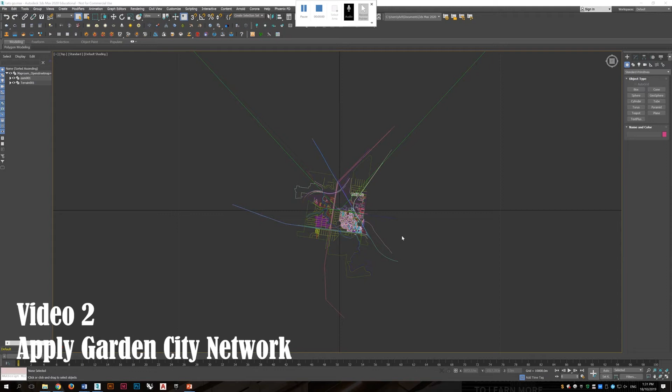Hello. In this video, I will focus on how to apply the Garden City network onto site Albion.

First of all, we go to create and make a plane into it. Then we go to material editor. We have to make sure the current renderer is V-Ray, because we're always using V-Ray as our renderer and we have to make it consistent. We also need to have a look on exposure control to make it under V-Ray as well. Then we create a V-Ray material.

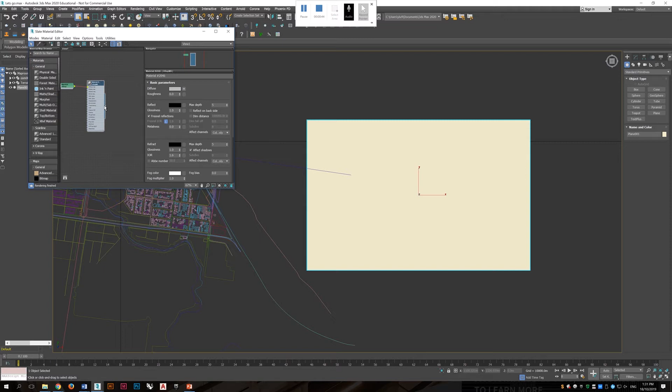Then we select the diffuse, select bitmap, and choose the image we want, which is the Garden City plan. Then we apply this material to the plane, but nothing's showing because we have to click on Show Shaded Material in Viewport. And now here it is.

And we just need to adjust the size of this image because it feels like it's been stretched. Okay, change the scale, and we are going to change the existing context.

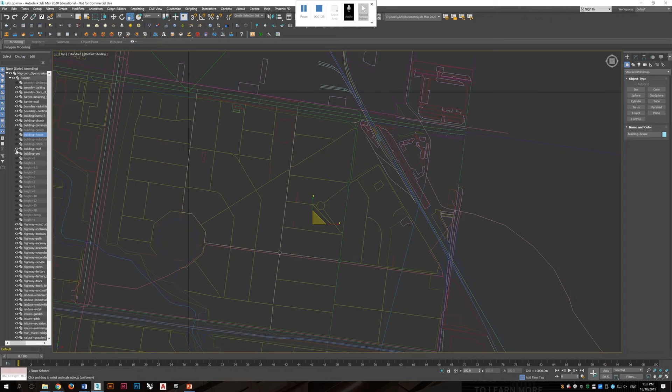We don't need the building anymore because we're going to make new ones. So we're making the old one invisible. And also the networks, because we're going to have a new network instead.

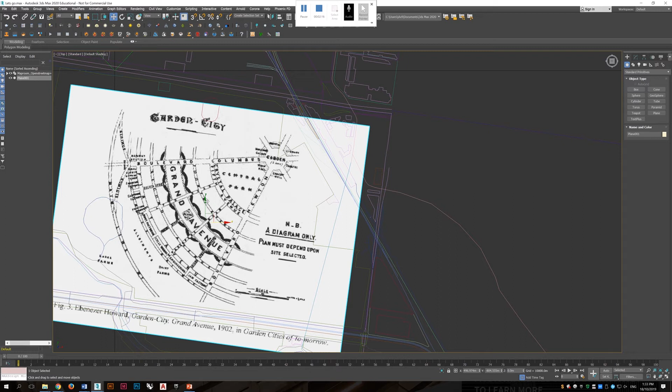Now we put our base map into our context and align the core of Garden City to the flour mill, because we are going to make the flour mill the future library and museum. And just like that, we are going to use the circle tool to trace the network of Garden City urban planning.

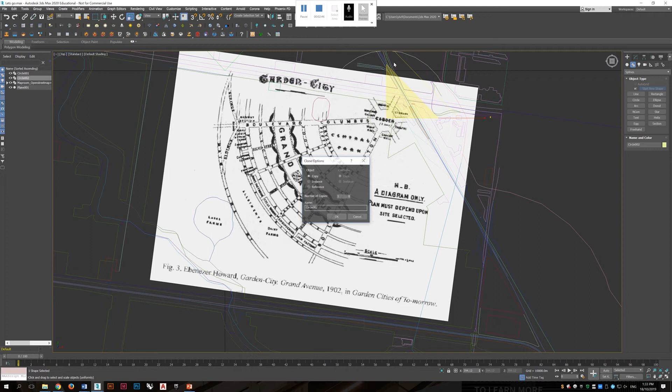And also we will have the other side as well. We rotate the base map and align the core onto the public green space, which is our community garden, which will hold the future community services and activities for local residents. We also draw the circle networks as well.

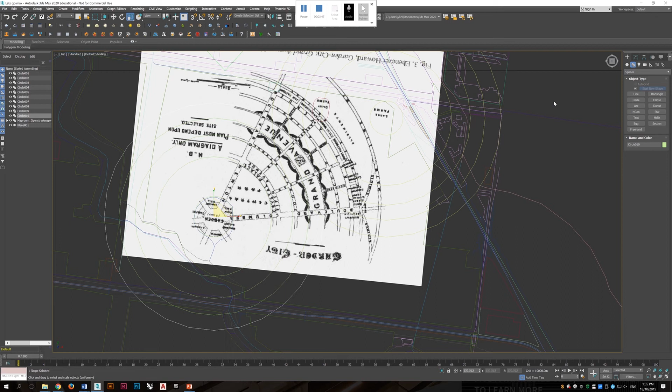After that, we are going to draw the linear laneway, especially these three in the middle, because they are going to act as the future public open space, so people can play in the street. Also, the local retailers are going to have their business happening along these streets. So they're really important.

We can draw some finer network going into the suburb as well.

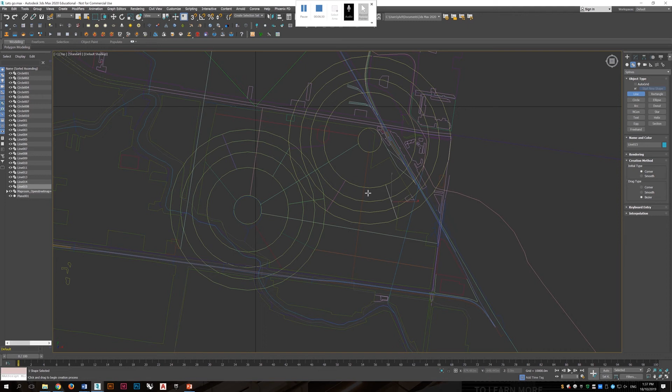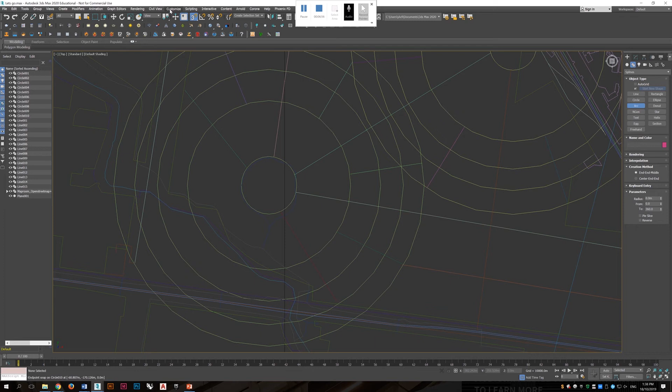And one important thing we can see here, the circles, many of them are out of the boundary of Albion. Some of them are going into the park beside it, which means we are going to draw arcs along these circles, but make sure they are within the boundary.

So now we're having the whole network of Garden City in Albion. And the next thing we are going to do is make these splines more like a road.

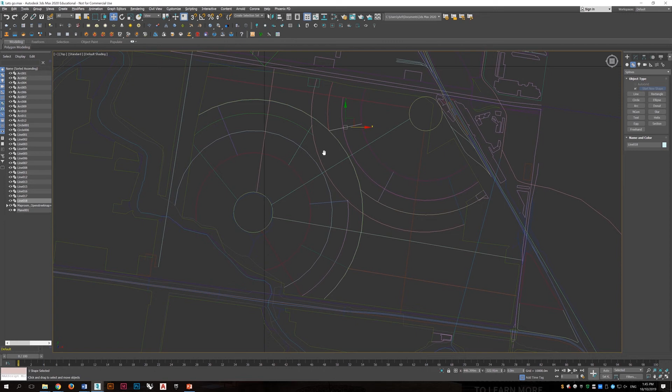So what I'll do first is draw a spline here, and I'll make the length of it 40, so a 40-meter wide road.

And we go to create compound object. We select on loft, and get shape. Choose the 40 spline, and we have a shape for our road.

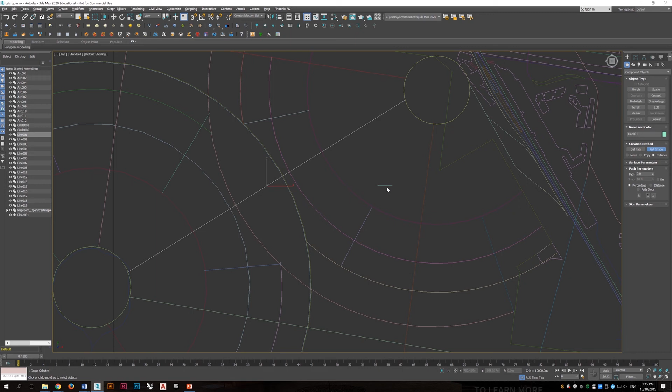And we can do the same thing to all the splines we just drew as the network.

Then we'll add materials to this road to make it more like a road. We go to V-Ray material, and again, for diffuse, we will choose a bitmap, which will be the image of the road we want, downloaded from a website, from Google.

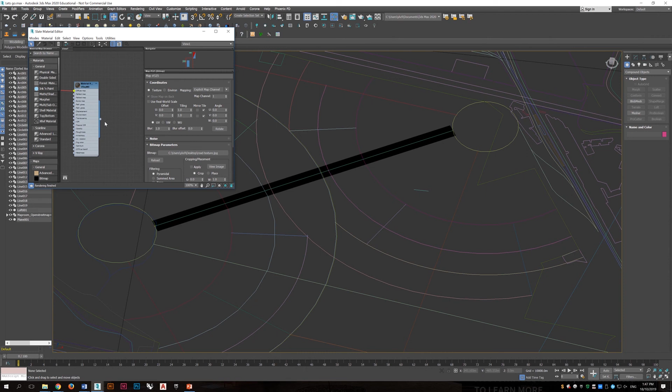And again, we apply this material to the road. And this time, again, we are going to apply a UVW map to it. We will choose planar and play with the gizmo. Rotate it to the suitable location and adjust the scale of this image, and we can see the road texture is on the road we just created.

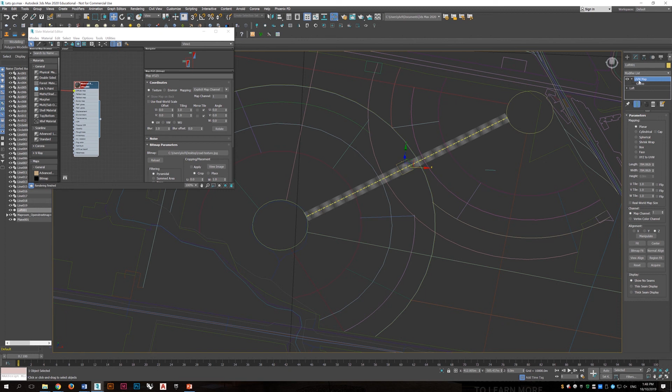So we can apply the loft and material to all the splines we just drew, and we will have a full network of roads. Thank you.